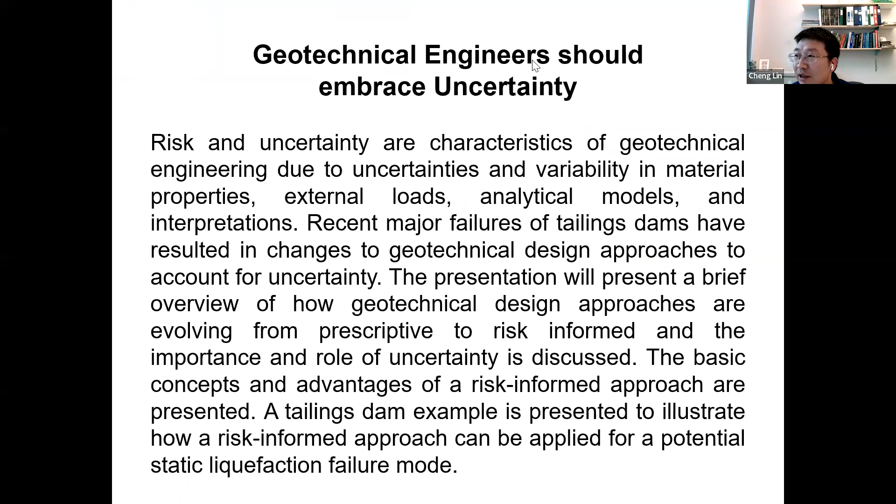Well, thank you for that kind introduction. It's an honor to be the third lecturer for the Soil Mechanics and Foundation Engineering Division of the Canadian Geotechnical Society. I've been a proud member of the Canadian Geotechnical Society for close to 50 years now, and it really is one of the best geotechnical societies in the world, and I'm certainly very proud and honored to be a member. But I do want to cover quite a bit of ground, so I'll get started quickly here.

So the title of the talk is that geotechnical engineers should embrace and understand uncertainty. Okay, how do I get it to go forward? That's going to be a struggle.

This slide, I took the title from Professor Morgenstern, and for the last couple of years, Professor Morgenstern has been using this term that we're evolving from a period of certainty to uncertainty. He's working on a paper that I think has that title, and I think that really captures the essence of what I'm going to try and talk about.

Risk and uncertainty are characteristics of geotechnical engineering due to uncertainties and variability in the material properties, external loads, analytical models, and interpretations. Design approaches are evolving to account for uncertainty, and that's what I'm going to talk about here - how design approaches are evolving, and then I'll give some examples.

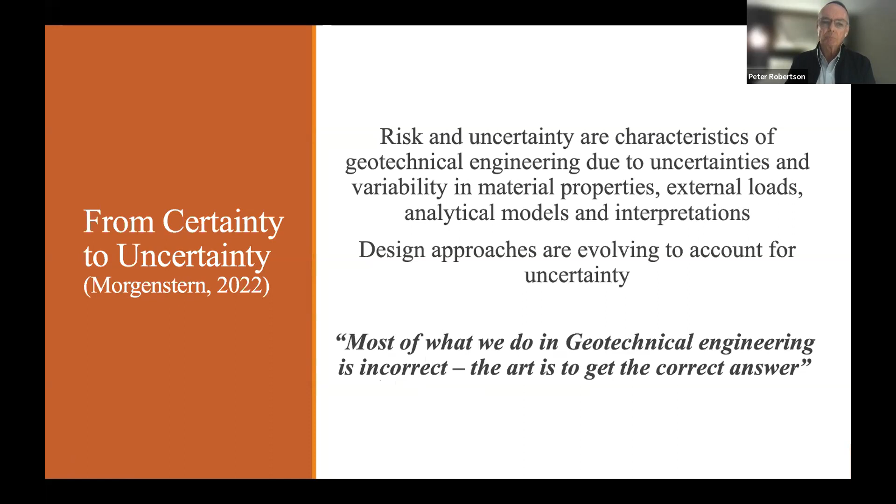If I briefly describe how design approaches have evolved - traditionally they were very prescriptive. In foundation design, that's often working stress design, but prescriptive in the sense of a traditional design approach based on an overall factor of safety. Modern design codes are based on these factors of safety, or for foundation design, partial safety factors such as the load and resistance factor design approach. The problem with this is it can lead to complacency and depends a lot on the competency of the designer. It's also important to note that factor of safety is unreliable if the site has a brittle failure mode.

I'm going to illustrate that in a moment. I've just shown an example at the bottom of a typical prescriptive design approach - this is from the Canadian Dam Association. It sets out different loading conditions and different minimum factors of safety that you're prescribed to meet.

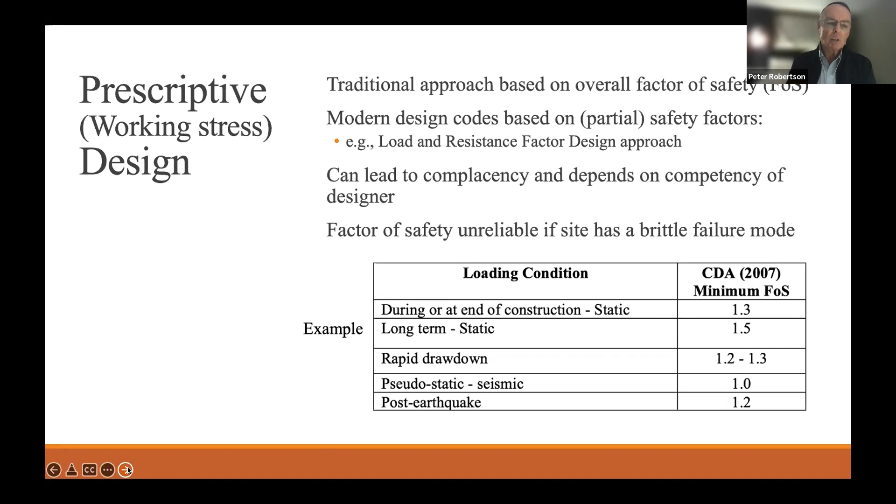But I would like to illustrate a brittle failure mode. I was involved in the investigation of the Feijão tailings dam failure in Brazil, often referred to as the Brumadinho failure because it occurred close to the town of Brumadinho. It was unusual in the sense that, first of all, it was captured on video, and we're going to look at that video in a moment.

It was January 25th, 2019, around midday, a sunny day, partly cloudy. Video cameras had been set up recording the dam, so they captured this high quality video image of the failure.

The things to be observed were that there were no signs of distress on the dam. In fact, people were on the dam at the time, and in the center you may make out a small drill rig that was drilling a hole - it had almost completed its hole down to the foundation. There were other vehicles and other people, some people on the lower portions, and there were also some cows grazing on the grass. So there were no outward signs of distress, and then quite suddenly, this happened.

You'll note that suddenly the crest drops and the toe begins to bulge, and the whole thing begins to collapse and move out extremely rapidly. In a period of about 15 seconds, the dam had completely failed.

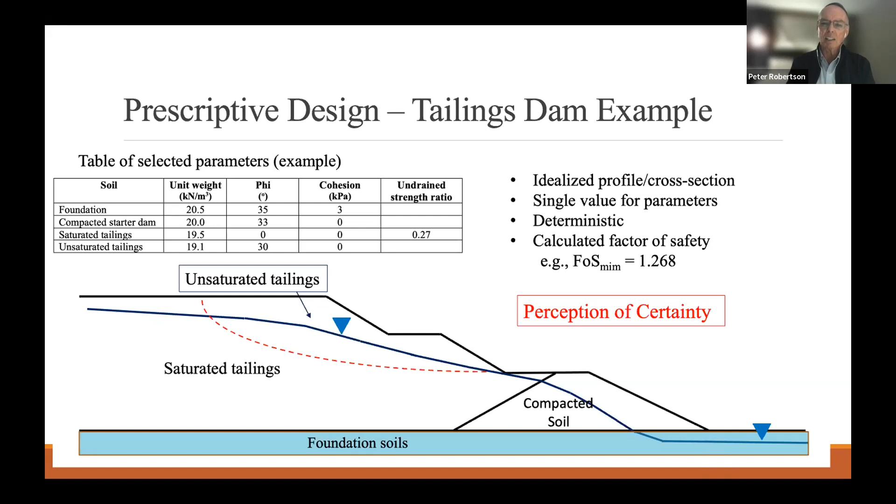I wanted to illustrate that it's usually quoted to 3 decimal places, so 1.268. This clearly gives a perception of certainty - when you do a calculation like this and present a factor of safety like this, it's clearly presenting to the client and all the various stakeholders that will read the report that there's a certain level of certainty here, since you're quoting it to 3 decimal places.

Designs evolved from the initial prescriptive and then moving to more precautionary design. This is the prescriptive combined with the observational method. Any performance that indicates potential failure is identified and it's monitored to determine if mitigation measures are needed. That's the sort of simple concept of the observational method.

So running a prescriptive design and then combining it with the observational method requires some contingency design or action that can be implemented in a timely manner, but it's reactive - based on the observations. It's effective when the variations in performance can be foreseen and remediation measures identified and implemented in advance.

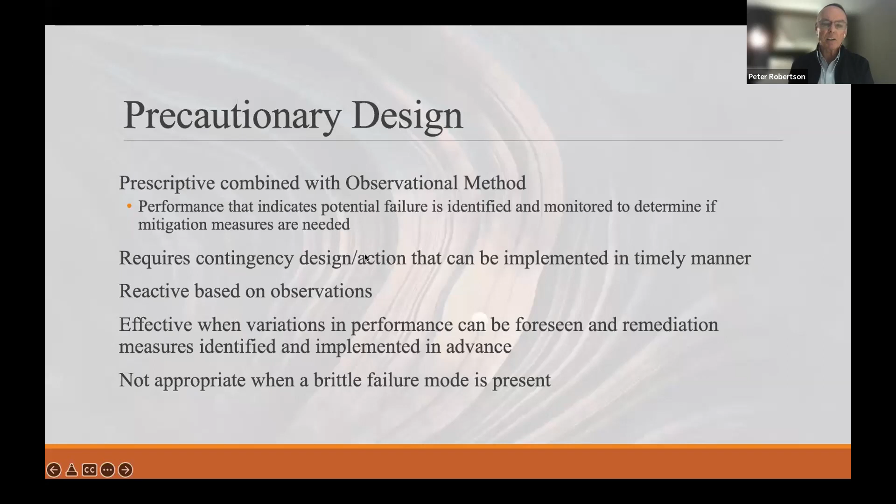It's not appropriate when you have a brittle failure mechanism, such as the Brumadinho video that we saw, because after all, there was very little signs of distress. There was no impending failure mechanism occurring, and so there was no time to respond.

Here's an example - that same sort of example I'm going to use, where you've got this upstream constructed tailings dam, you've got piezometers in the tailings, and in the starter dam, you've got an inclinometer survey, you've got InSAR, and you've got observations of seepage and cracking as a typical example. But it's not appropriate for brittle failure mode because Brumadinho had all of these.

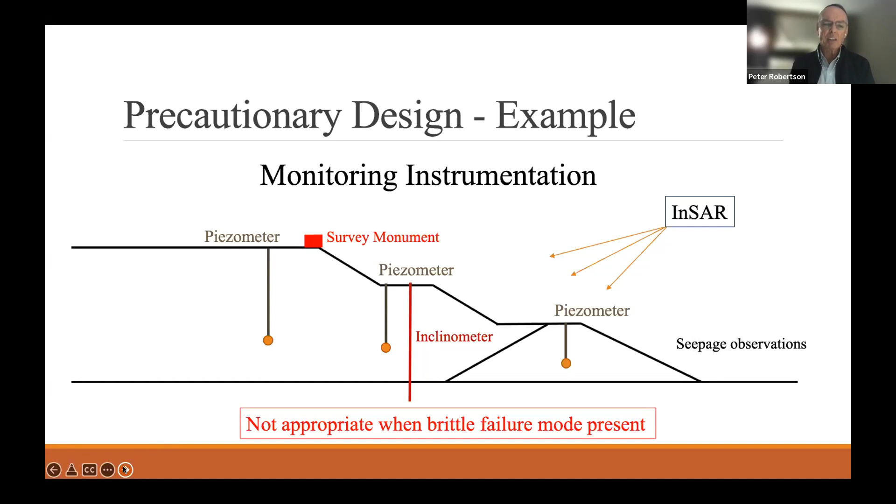They had piezometers, survey, some inclinometers, they were using InSAR, observing seepage, and it was being inspected on a regular basis. But all of that did not help or negate the fact that it did in fact fail quite suddenly.

So that precautionary approach has evolved to a more performance-based design. It's a natural extension of the observational method. It requires detailed modeling to forecast the behavior and verify it with observation and surveillance. It's only possible because of advances in monitoring and analysis.

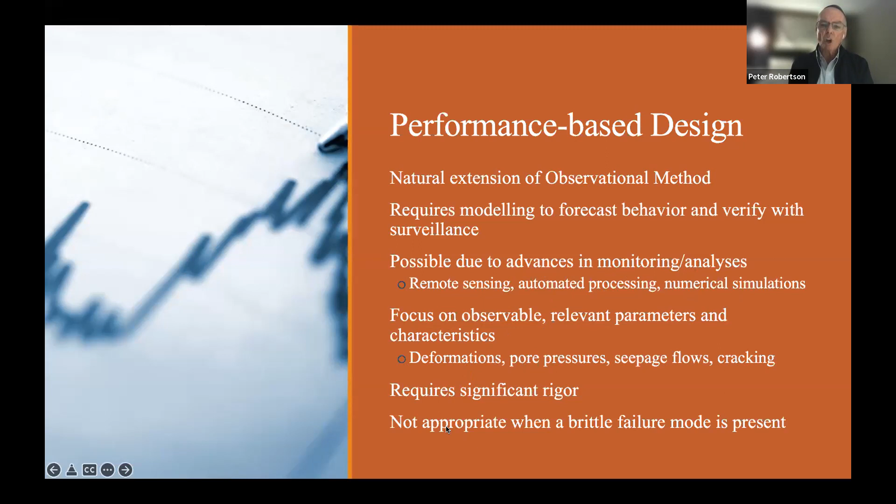So we now have remote sensing, automated processing of the sensing, and complex numerical simulations to predict the behavior. It's focused on observable relevant parameters and characteristics, such as deformations, pore pressures, seepage and cracking, etc. It requires a significant level of rigor, and again, it's not appropriate when you have a brittle failure mechanism.

So its design is particularly in mine tailings, and that's what I'm going to talk to, but I think it will be true for many areas of geotechnical design. It's moving towards a risk-informed design approach.

And in mine tailings, it's driven in part by these recent brittle failures. I showed you Brumadinho, but the failure of the Fundão tailings dam in 2015 was also a brittle failure mechanism. So two big tailings dam failures that were both brittle failure mechanisms really made the industry sit up and rethink how it was doing things, and it's moving towards a risk-informed approach.

So it's based on probability and reliability concepts, and I will briefly review some of those basic concepts. It uses a target annual failure probability or target reliability index to verify margin of safety, and it's informed by appropriate assessments of risk and uncertainty.

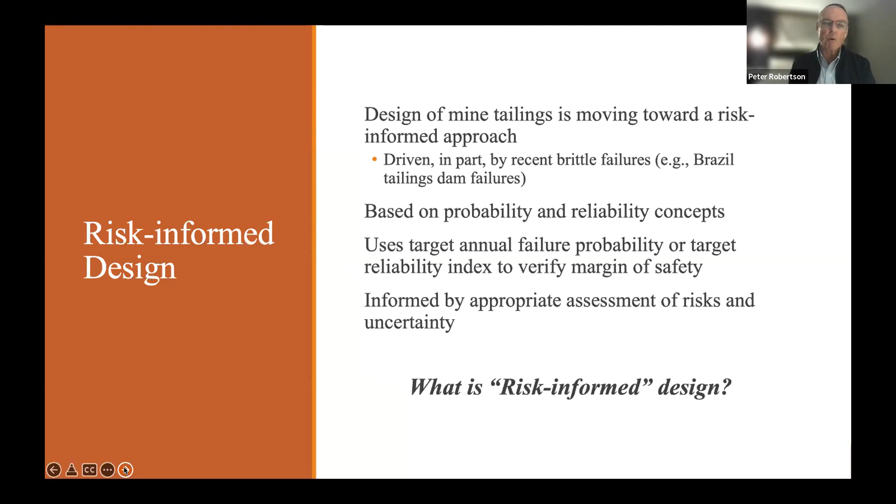So what is risk-informed design? Before we get into that in detail, it's worth covering basic elements of uncertainty and probability. Here I'm going to draw quite heavily from some publications that Suzanne Lacasse has done. She's published quite extensively on probability and risk, and many of those papers are very useful. I've taken an excellent one that she put together in 2019 for the European conference.

This is a frequency plot of, say, undrained shear strength. You see a classic histogram where you've got a mean and a standard deviation of the undrained shear strength, and of course you've got a coefficient of variation, which is that standard deviation divided by the mean. And the uncertainties, or how wide or how large that standard deviation is, are caused by two major things.

One is—I tend not to like these fancy terms—the aleatoric uncertainty, which is due to variability, the natural randomness. Soil, of course, is naturally variable, and so we deal with this natural randomness all the time. We can't reduce it, however we can understand it more by doing more testing to quantify that natural randomness, that variability.

And then we have epistemic uncertainty, and that's really lack of knowledge, such as measurement uncertainty, as well as model uncertainty. And this can be reduced. If we do better tests, better interpretation, we can reduce this epistemic uncertainty, but there'll always be some level of uncertainty.

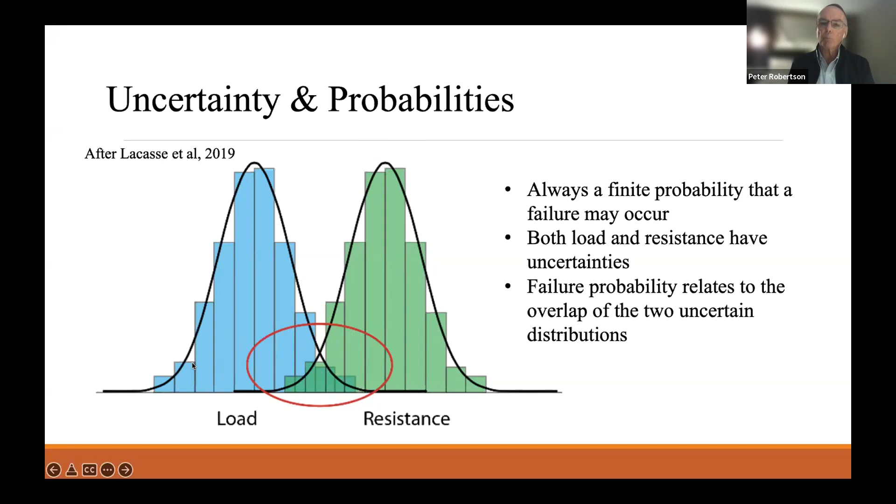If the resistance is smaller than you think and the load is bigger than you think, there is a possibility that failure could occur. And the probability is essentially the area under that curve where the two cross over. So both load and resistance have uncertainty, and failure probabilities relate to the overlap of those two uncertain distributions.

And Suzanne also shows this nice plot. I like this plot because it shows two examples. You have one example where the mean factor of safety is relatively low, it's 1.4, but the level of uncertainty, the standard deviation, is small, so it's got a relatively small uncertainty. This factor of safety has a probability of failure of 1 in 10,000, so it potentially could fail once in 10,000 years. And then you have another one which has much larger uncertainty.

It does have a larger factor of safety, so the mean value gives you a larger factor of safety of 1.8, but the probability of failure is now really just 5 times 10 to the minus 2, or 5 in 100 years, or once in 20 years. So there's a big difference between that high factor of safety, but it actually has a probability of failing once in 20 years, compared to the lower factor of safety that has a probability of failing once in 10,000 years.

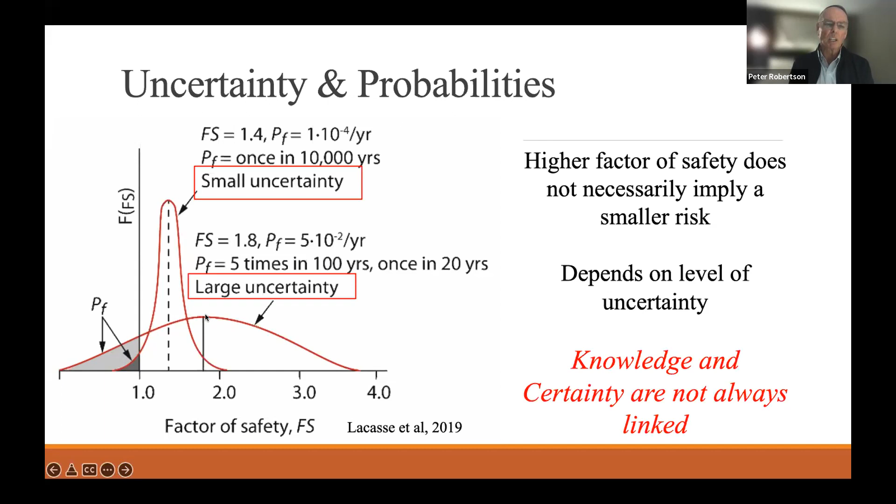So high factor of safety does not necessarily imply smaller risk, and it depends on the level of uncertainty. In other words, the knowledge that you have about the problem is not necessarily linked to the level of uncertainty. You may know a lot about that case that has a factor of safety of 1.8, but the various uncertainties, whether aleatoric or epistemic, result in a large level of uncertainty, and so a higher probability.

Now, Silva and his colleagues in 2008 tried to look at historical cases, and they combined historical and subjective probabilities for engineering practice. They came up with this attractive diagram that looks at annual probability of failure as a function of factor of safety.

And they defined 4 categories, basically from best practice down to poor practice. They talked about best practice as designed, built, and operated to a state of practice, all the way down to the poor one, which is little or no engineering. You can see the examples they used to classify that.

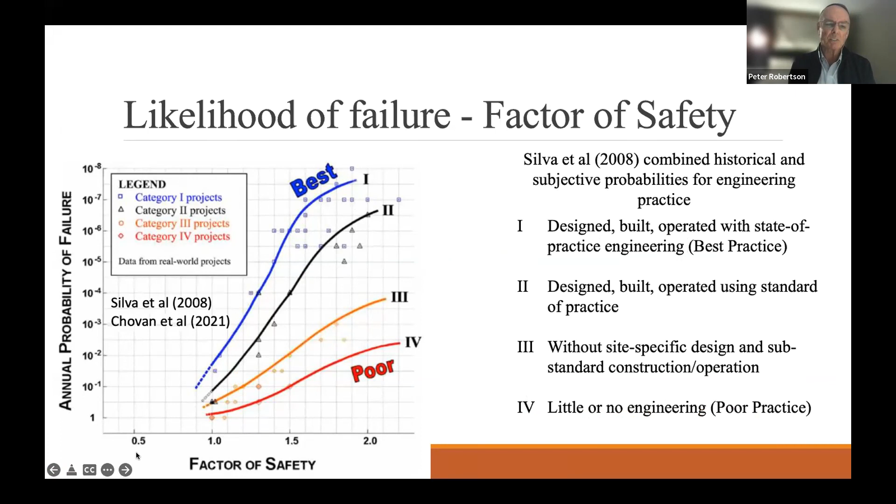But because knowledge and uncertainty are not linked, it might be better to think of this in terms of best practice being when you have low uncertainty, and poor practice being where you have high uncertainty. And that's not linked to knowledge.

So you could well have a condition where you have very good knowledge with little uncertainty, and that would be the upper one. But you could have relatively good knowledge, but with large uncertainty - so 3. So 1, 2, and 3 all could have relatively good knowledge; it's just that they have large levels of uncertainty.

And again, not always applicable to brittle failures. Here, what I've done is - El-Ramly did his PhD at the University of Alberta under Professor Morgenstern, and he looked at 10 case histories. He used limit equilibrium and probability analysis to determine the probability of failure for these 10 case histories.

So he was able to plot these on here, and I've added them here - he didn't actually add them to this plot, I've added it to the plot. It shows that his case histories do fit the general trends of this plot, but only when you think of it in terms of uncertainty.

So some of these cases, best practices were being done, and a lot was known about the site, but they basically acknowledged that, particularly in examples dealing with undrained shear strength. Whenever they were dealing with undrained shear strength of a fine-grained soil, there's large uncertainty of exactly what the value of undrained shear strength is. Even though you did a lot of field work, CPTs, took samples, a lot of lab testing, there's still a high level of uncertainty. So knowledge and uncertainty are not necessarily linked.

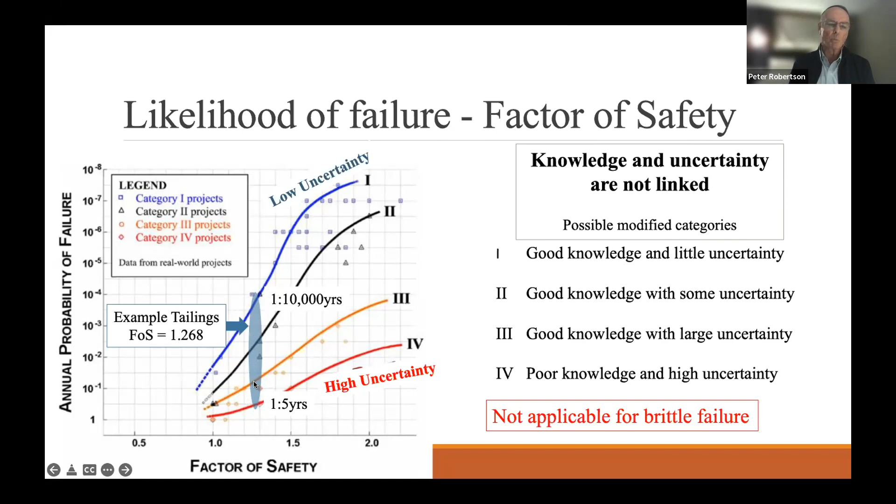And in fact, if we go back to that example I showed that had a factor of safety of roughly 1.3, you can see that if there's high uncertainty in the peak undrained strength, it could be a risk of 1 in 5 years, one failure in 5 years. Or if there was a very low uncertainty, it could be as low as 1 in 10,000 years. But because it's peak undrained strength, we generally move towards higher levels of uncertainty, and so you fit down into these higher annual probabilities of around 10 to the minus 1. That was using peak undrained strength.

So when we talk about risk, what does risk mean? Risk is really this combination of likelihood of failure and the resulting consequences - it's the product of those two. So it combines the probability and the severity.

And in simple terms, it addresses 3 questions. First of all, what can happen? What can go wrong? How likely is it that it could happen? And then if it does happen, what are the consequences that could occur? So risk is higher when the likelihood and consequences of failure are higher, and risk is lower when the likelihood and consequences are lower. It's the combination of the two.

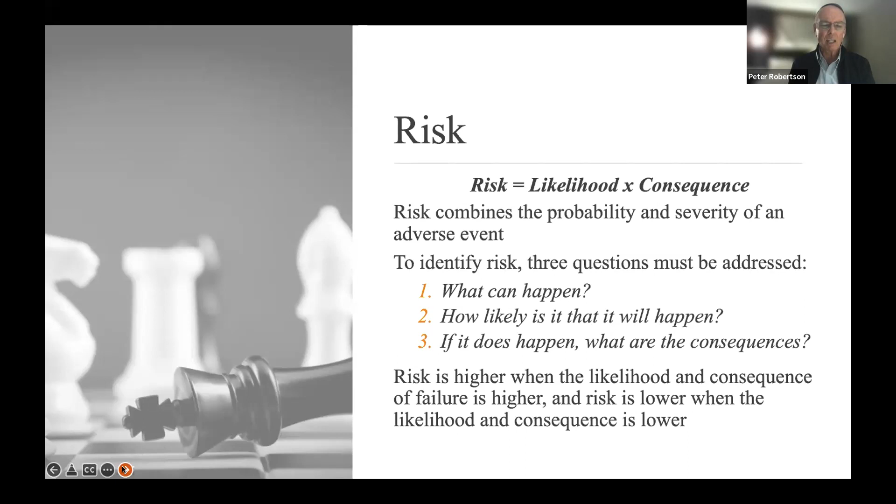You'll see later that in many cases, it's driven more by consequence than by likelihood. Now, when we look at deterministic analysis, which is common in a lot of geotechnical engineering, that prescriptive approach we showed was purely deterministic. It's suitable when there's little uncertainty in failure modes, parameters, or forces. No randomness is involved in estimating the future states.

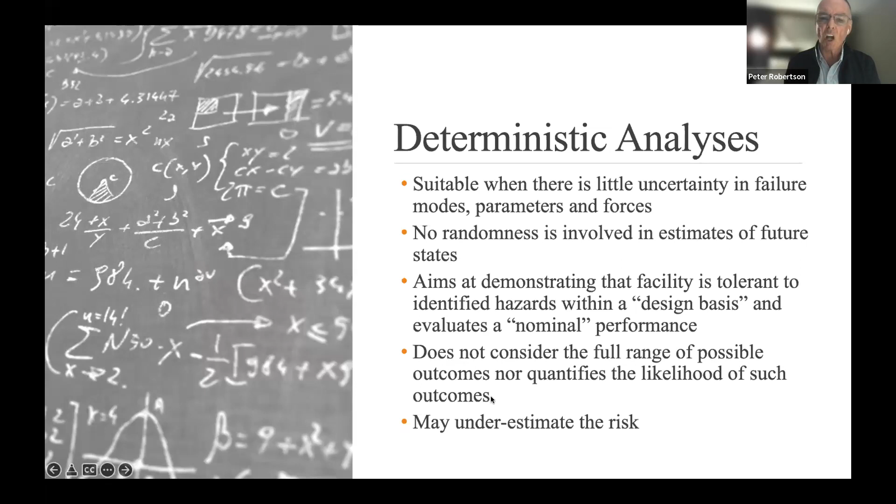It aims at demonstrating that the facility is tolerant to identified hazards within a design basis, and it evaluates some nominal performance. It does not consider the full range of possible outcomes, nor quantifies the likelihood of such outcomes. And of course, it may underestimate the risk.

So we've got probabilistic analysis, and they're obviously more suitable for when you have uncertainties that govern the design. And really that applies to a lot of geotechnical problems. We deal in a lot of uncertainty. And so in many respects, geotechnical engineering is moving towards a more probabilistic type approach and moving away from deterministic.

It attempts to include all possible scenarios, their likelihood and impact. It's comparable to a series of sensitivity analyses. I quite often recommend that people at a minimum do a series of sensitivity analyses, and it's relatively easy to do a relatively large number of them. That doesn't actually quantify the risk and uncertainties, but at least it begins to bracket the likely outcomes.

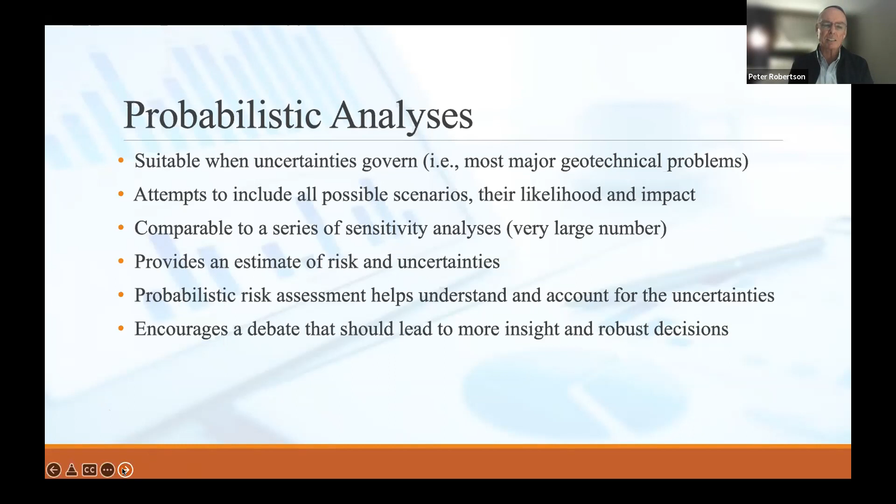If you do a probabilistic analysis, it provides an estimate of risk and uncertainty, and probabilistic risk assessment helps understand and account for uncertainties. More importantly, it encourages a debate that should lead to more insight and robust decisions. So the process of a risk assessment using probabilistic analysis at least gives you insight.

In the tailings world, the ICMM produced this tailings management good practice guide, and they talk about a risk-informed design made up of these components: risk assessment, which is first risk identification, followed by risk analysis and risk evaluation, then moving on to risk management, then communication of risk, and then surveillance and review, and based on that surveillance and review and performance, you update the risk assessment.

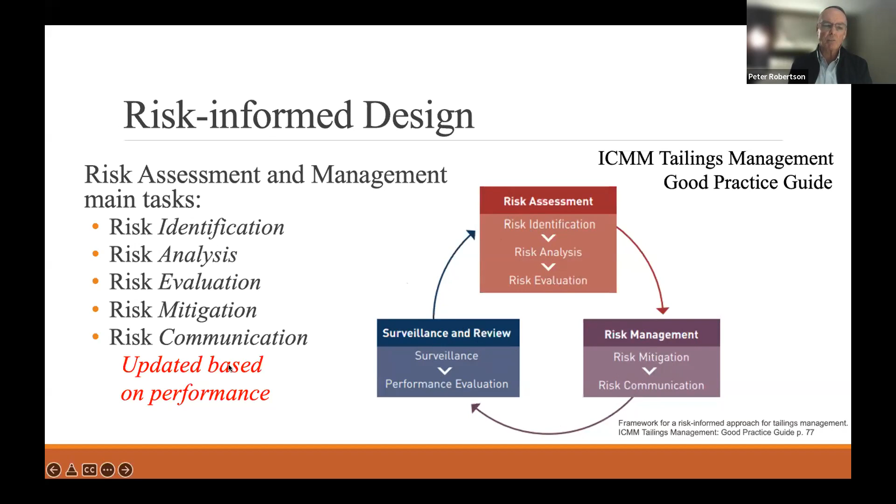So it's a circular process. It doesn't mean you stop doing surveillance and monitoring. That continues to be an important part, but it's part of this cycle of the risk-informed design. I've taken these slides from the International Council on Mining and Metals, since they're quite nice.

So under risk identification, the first step is to identify site-specific potential failure modes. You look at natural hazards, such as earthquakes, extreme weather events, possible landslides, etc. Any hazard that could impact the site.

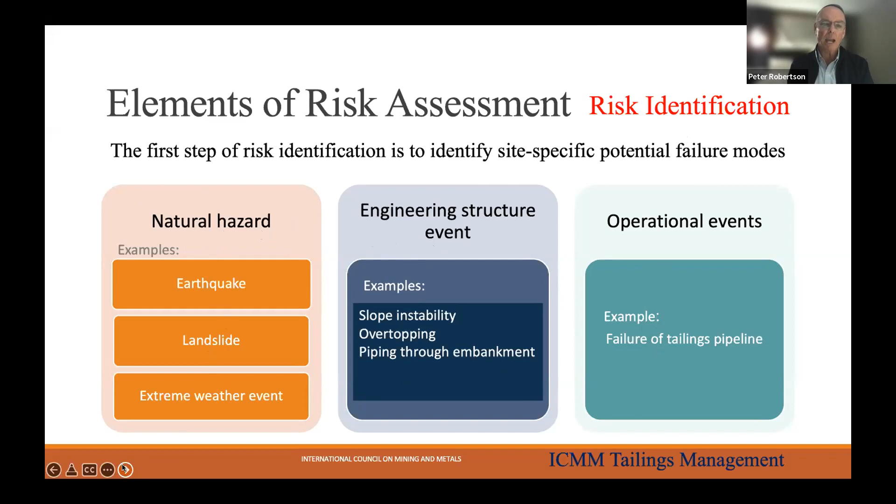You look at how that would impact the structure, such as slope instability, overtopping, internal erosion or piping through the embankment. And then you also look at operational events, for example, failure of a tailings pipeline. So you look at all of these risks that could impact the structure, and then you identify potential failure modes.

So you run a potential failure modes analysis, and here the goal is to try and identify credible and non-credible failure mechanisms. If they're non-credible, you rule them out. If they're credible, you bring them forward to estimate the likelihood and the resulting consequences.

So the risk analysis has three broad approaches. One is a purely qualitative approach - it's subjective estimates through consensus of experts. Then there's a semi-quantitative method, which involves calculations as well as consensus of experts. And there are various ways to do that.

The one I've shown here is an event tree, illustrating again from one of Suzanne's papers. It's a very nice summary of an event tree where you look at some triggering mechanism, whether or not it's strong, intermediate, or weak. You look at the geotechnical conditions, whether or not it could lead to failure, and then eventually what the consequence could be and what the ultimate likelihood or probability of that sequence of events is.

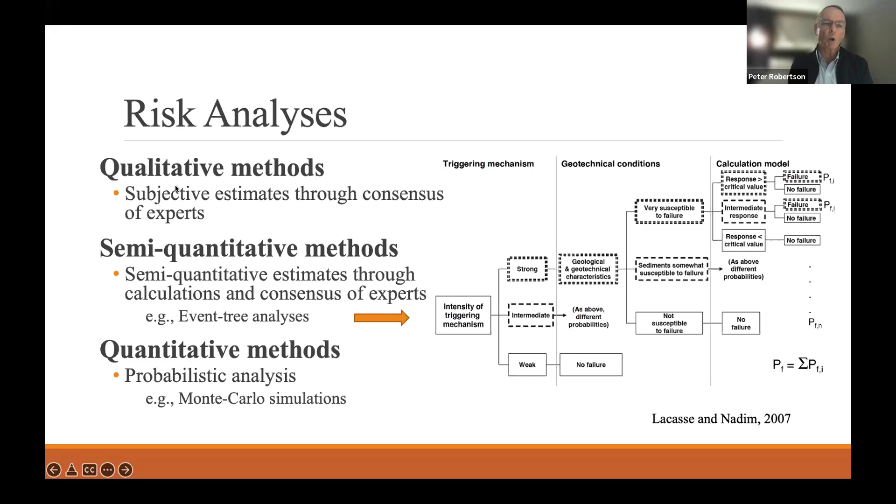And then, of course, you can also do a full quantitative analysis, which involves a full probabilistic analysis, such as Monte Carlo simulations. This is obviously a lot more involved, and not all problems are suitable for a full probabilistic analysis. The trend is to move away from qualitative and more into semi-quantitative and heading towards more quantitative methods.

Now, when it comes to looking at consequence, this is a consequence classification matrix. Hopefully you don't have these things blocking your view that I have for me.

The Global Industry Standard on Tailings Management, GISTM, developed this consequence classification. It's similar to others, but I've chosen this as an example. It has 5 grades from low all the way up to extreme, and it looks at population at risk, potential loss of life, environmental impact, social and cultural factors, and infrastructure.

At the end here, I've added that maybe you could even add another category of reputational damage. Particularly in the mine tailings industry, if you have a significant failure, there's a loss of reputation, and maybe that should be considered too.

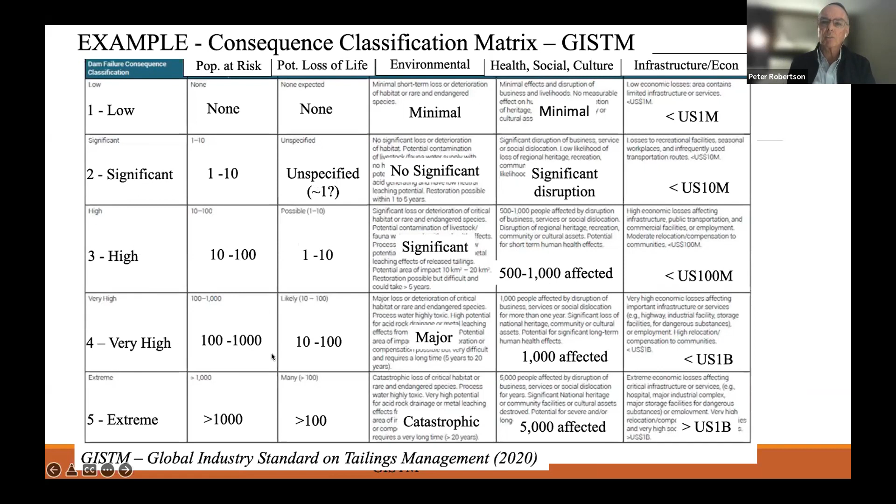If you look at it, anything significant, anything above high, is going to involve a loss of life. High is anywhere between 1 to 10. Significant is unspecified, but one could argue that essentially means one loss of life. It's a bit vague on that, but certainly any classification greater than high is going to involve loss of life, significant environmental damage, and infrastructure costs, etc., less than $100 million.

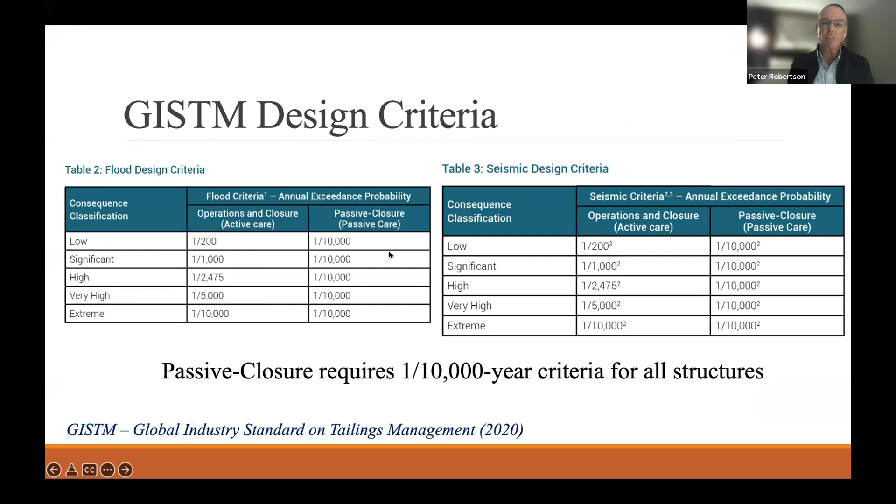GISTM also has design criteria, and it talks about during operation and active care closure, and eventually passive care closure. Depending on the consequence classification depends on the level of design. Here it's for flood, this one is for seismic. But what you notice is that when it comes to closure, it all goes to 1 in 10,000 years.

So it's basically saying that when you're designing something like this, you need to design with closure in mind, because eventually you're going to have to design for 10,000 year events. So possibly you need to keep this in mind even during operations, because eventually you're going to have to go there. It can be more cost effective if you start the process during operation and design.

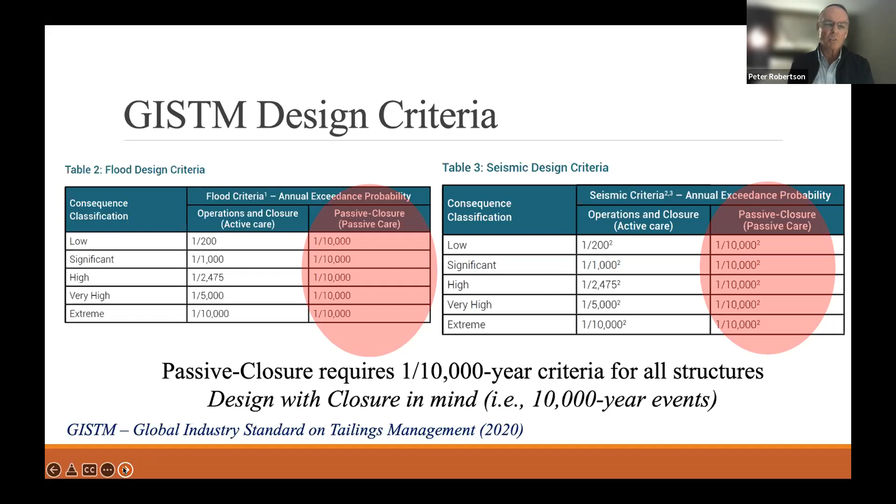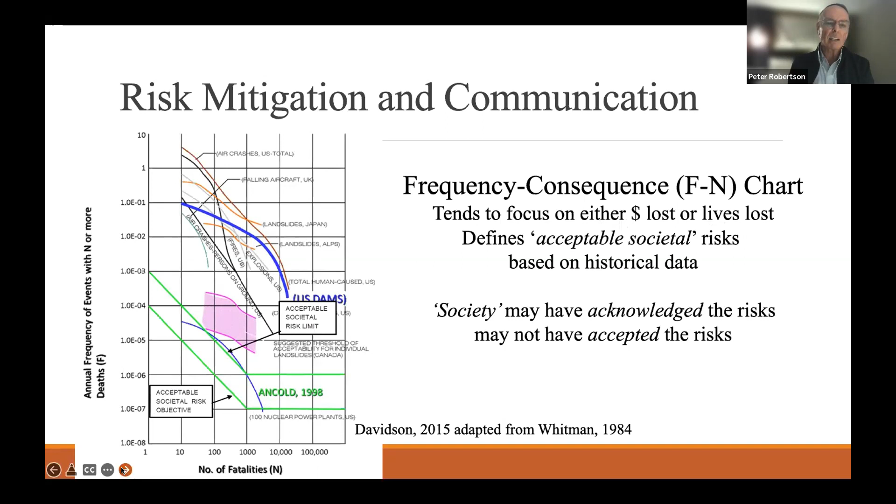Then the US Bureau of Reclamation updated it, and they also defined a region they refer to as the ALARP region, as low as reasonably practicable. You've got probability on the vertical axis here, again number of fatalities, and it has a starting point of 10 to the minus 4.

That originates from, and Suzanne showed it in her 2019 paper, the annual probability of dying, at least based on Statistics Canada, is about 1 in 10 to the minus 4 in the early years of life. I often think that a 1 in 10,000 mortality rate for children is sometimes regarded as the acceptable societal limit. But really, if your child dies, it's unlikely you're going to think that's an acceptable risk, even though statistically it is the average value.

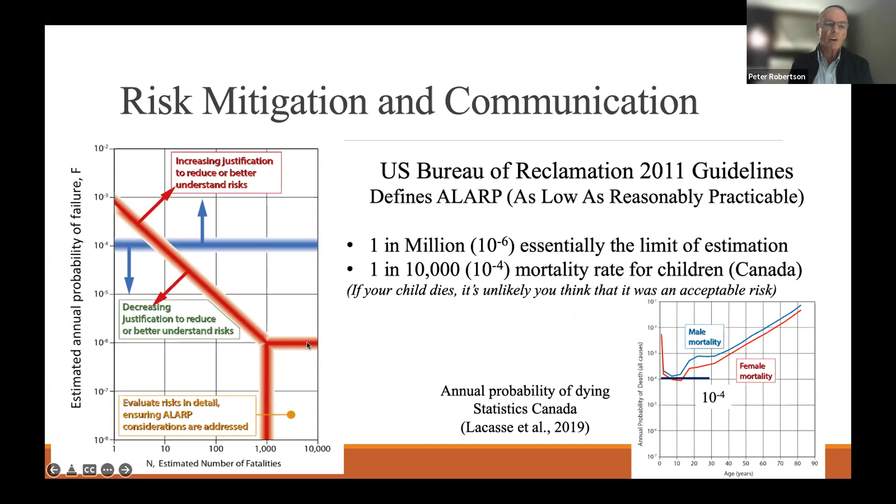It also highlights that a 1 in a million probability is essentially the limit of estimation. It becomes very difficult to estimate anything beyond 1 in a million.

When it comes to communication, this traffic light system has become quite popular. Here it is in terms of a qualitative risk assessment. You've got some hazard category on the left from high down to very low, and then you've got subjective consequence categories from 1 to 5, again 1 being low, 5 being high.

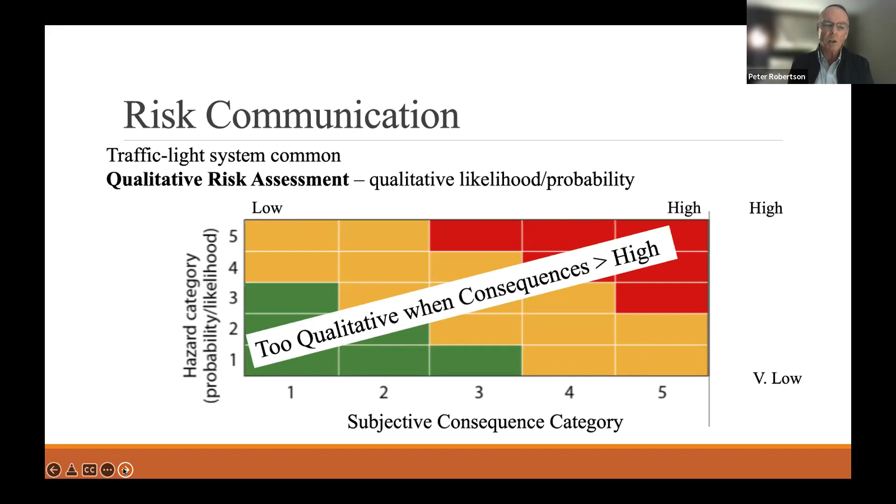The red region is obviously high consequence and high likelihood, and you want to avoid that area, and you'd ideally want to be in this area of low likelihood and low consequence. But it's too qualitative if the consequences are quite high, which, as you saw, as soon as you start talking about loss of life, you're into the high consequence region. So these quantitative risk assessments can have a similar traffic light system, but now you can see actual values.

So instead of subjective categories of probability, you've now got real probabilities from 10 to the minus 1, which is a very high probability, a 1 in 10 chance, all the way down to a 1 in a million chance. You can see the red and green, and you can see I've made the red area larger.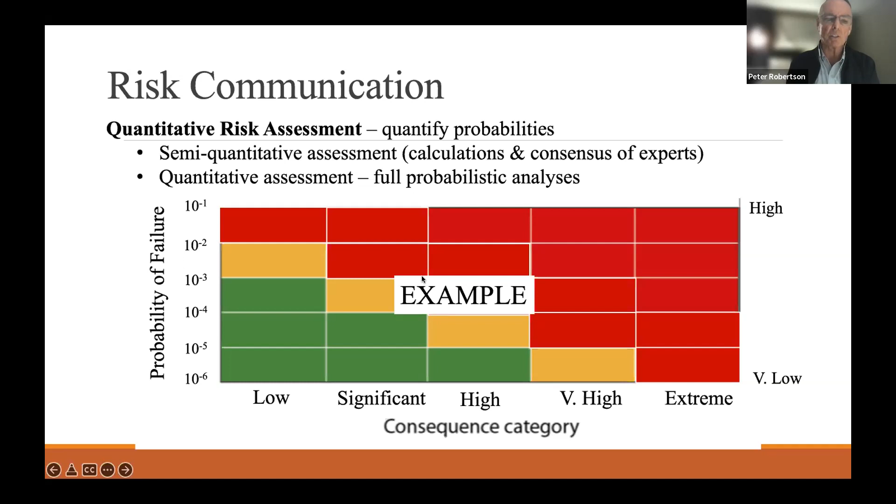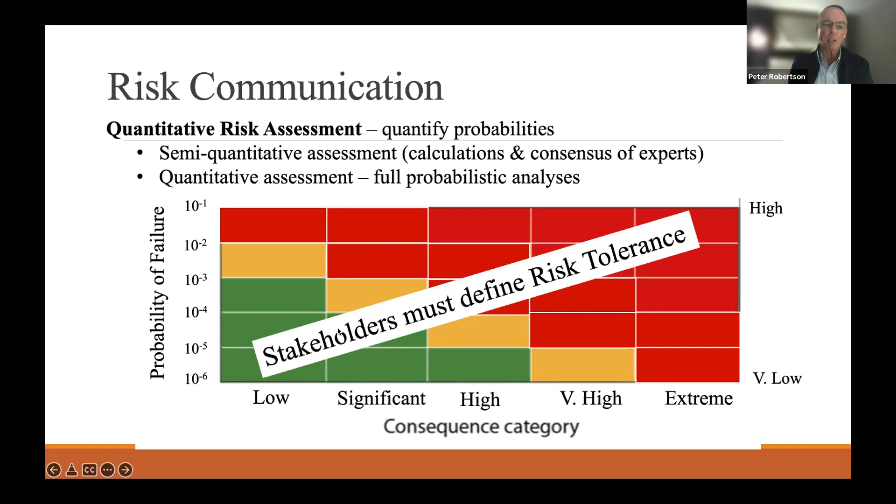Using the GISTM consequence category that says you want to have as large a red area as possible. Stakeholders need to define their risk tolerance - how big should that red area be? Only the stakeholders can really make that call. When it comes to risk tolerance, many mining companies have stated goals of zero harm.

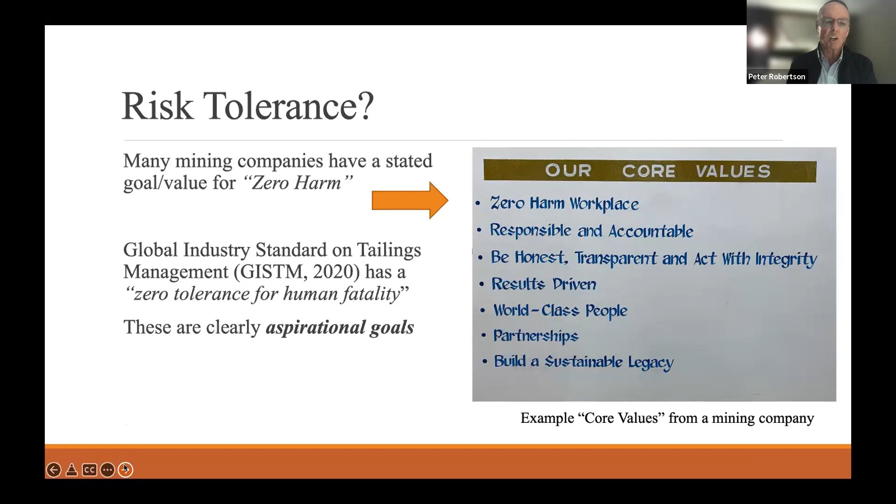This image on the right I actually took at a mine site because it was on the wall, and it was the stated goals, and the number one stated goal was zero harm workplace. This is quite common. The global industry standard on tailings management, GISTM, actually has a zero tolerance for human fatality. It's clear these are aspirational goals, because you can't guarantee there will be absolutely no loss of life, because accidents do occur. So it's clearly an aspirational goal.

But what it says is that owners are increasingly defining this zero tolerance for risk. And when you put that onto this traffic light system, what that essentially says is that nearly everything goes to red other than the low consequence category. Remember, low consequence is no loss of life. Significant could be 1, and high would be between 1 and 10. So a large portion of it starts to go red.

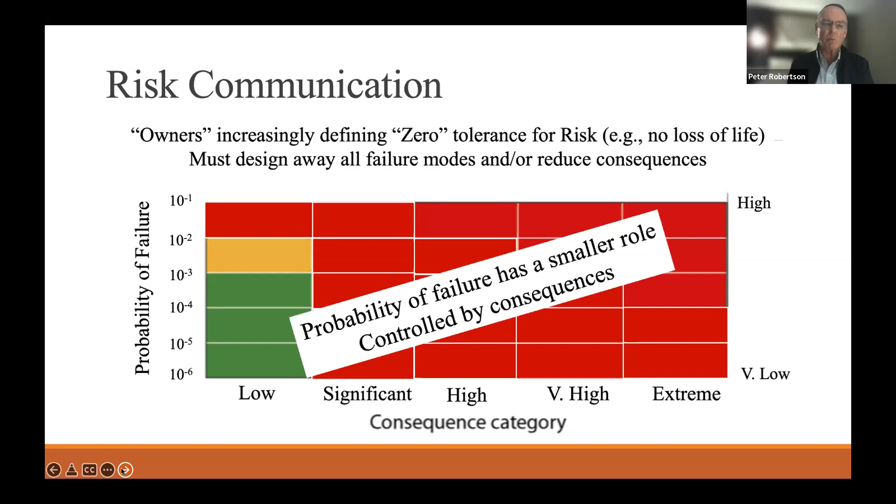And when that happens, it really says the probability of failure has a smaller role, and it's more controlled by the consequences. So basically what it says is you must design away all the failure modes and/or reduce the consequence. You've got to reduce the likelihood of failure down to extremely low values, and it becomes dominated by the consequence of what could go wrong.

Many years ago, when I talked about site investigation, I had said that the complexity of site investigation should be based on the level of risk of a project. If you had low risk projects, you could take a fairly simple approach. When it came to high risk projects, you often do a phased investigation - starting with some simple geophysics and in situ testing, usually followed up by more detailed investigation that could involve additional in situ testing, and usually collecting high quality undisturbed samples and high quality lab testing.

But since it's difficult to get large numbers of high quality samples, and it's costly and time consuming to do a lot of high quality lab testing, often this is in rather limited number. So you often have to then tie it back to the in situ testing, like the CPT, and get a site-specific correlation for this high-risk project.

So for tailing structures, since they're constructed over time, the risk evolves over time. Often when the project starts, the risk is relatively small - the structure could be quite small, it might have a compacted starter dam with very little water behind it, so the consequence of failure is very low. But over time, as the structure grows, the consequences increase, so the risk increases. And so, of course, the level of site investigation should be progressively increased in complexity and sophistication commensurate with the level of risk.

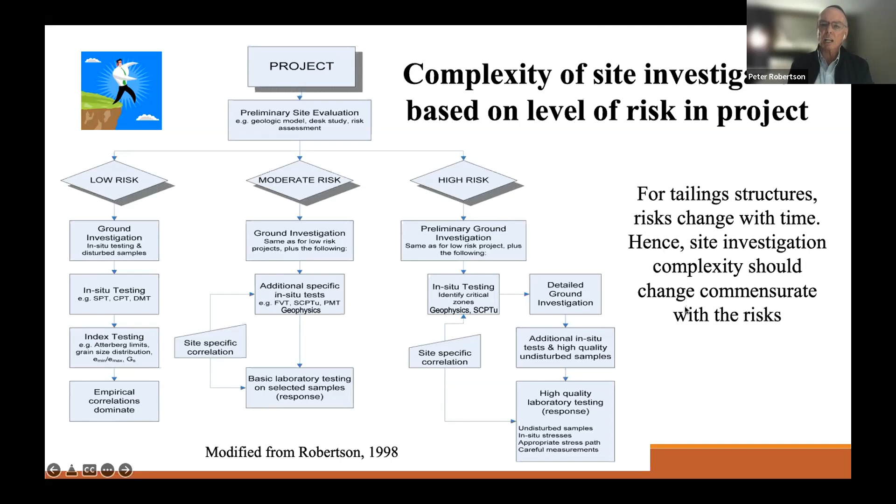So now I want to look at an example. It's a tailings embankment, upstream construction, a ring impoundment, about 4.5 kilometers long. I won't tell you exactly where it is, but I've been involved in several projects with similar geometry, so this is not that unusual.

This one has a consequence classification of very high. It has a starter dam about 15 meters high, compacted residual soils, with foundations of residual soils. It then went to upstream construction in two 9-meter lifts, with a goal of maybe going higher. There was cell raising - a cell construction that would try to deposit coarser, slightly denser sand in the cells, with the looser tailings behind. As I say, 4.5 kilometers long.

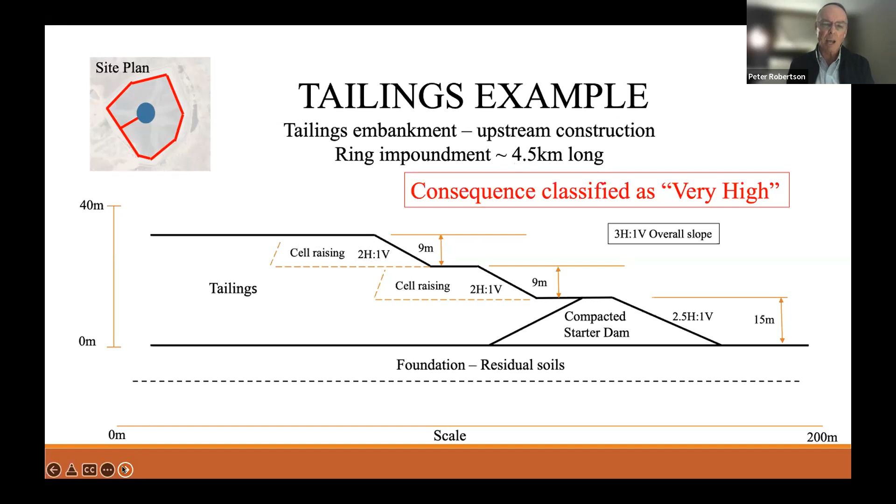I'm just looking at one example of a cross section. So they did CPTs and seismic CPTs.

They did some CPTs near the crest on the tailings, through the cell, and out in the pond, through the first raise, through the starter dam, the compacted starter dam, and also at the toe into the residual soils.

What we see is the tailings are predominantly fine-grained. They've got fine content greater than 50%. The plasticity index is generally less than 7%, and in cases non-plastic. Essentially it's interbedded sands and silts.

If you look closely, you can see the interbedded sands and silts. Each of the spikes up tends to be a sandier layer, and the dips down are the fine-grained silt tailings, and they're generally contractive.

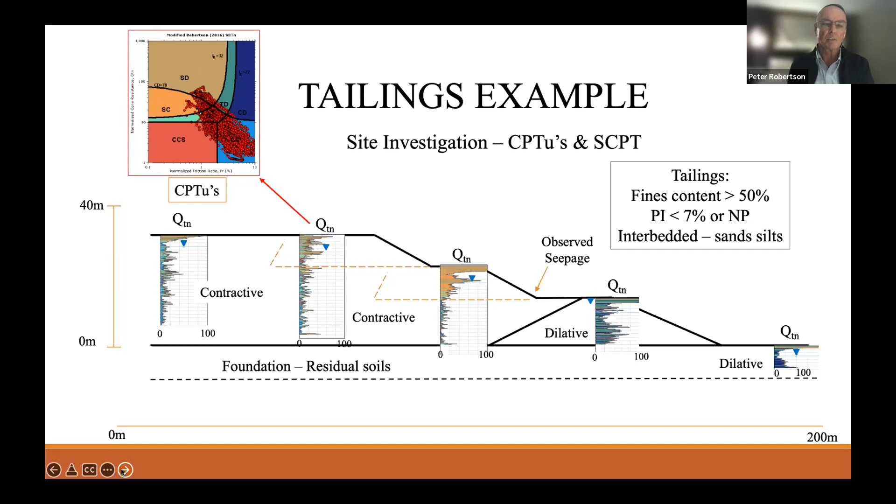The starter dam is dilative and the foundation residual soils are dilative. Here's an example of the soil behavior type chart, showing the contractive-dilative boundary. On this particular CPT, most of it plots in the contractive region. The little bit that's dilative is the upper portions of the cell construction, the sand cell, but most of it is relatively fine-grained silts and clay-like material, all on the contractive side—relatively typical for hydraulically placed tailings.

Looking at the phreatic surface and piezometric surface, there were relatively frequent dissipation tests. Most were relatively rapid, indicating risk of partial drainage in the sandy tailings. The coarser tailings is almost free draining, while the finer silt tailings is undrained. So you get spikes in pore pressure every time it goes through silt tailings—undrained—while the coarser tailings is either partially drained or fully drained.

Frequent dissipation tests show a piezometric profile that's less than hydrostatic. In this case, it's nominally about 70% of hydrostatic, so this arrow is indicating a slightly downward flow.

The excess pore pressures, shown in the piezometric profile in blue, are generally positive due to the contractive nature of the tailings, then negative in the compacted starter dam, and negative in the residual soils.

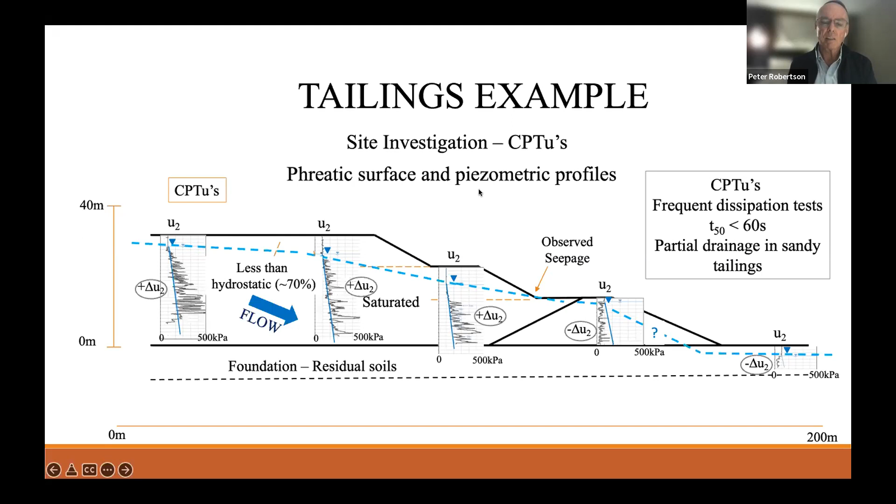So the CPTs and pore pressure are giving quite a bit of information. I mention this because it's common for people to install vibrating wire piezometers. But when you have downward flow, a single piezometer will give you a head of water pressure at that point.

But if you've got downward flow, it's less than hydrostatic. So if you take the head of water measured at that depth from a single piezometer, you can underestimate the real phreatic surface. I'm illustrating it here in orange compared to the real one in blue. So you need at least two piezometers vertically to understand the gradient.

Of course, ideally, if you've done multiple dissipations with a CPT, you already know the gradient. So you can take that gradient and adjust the actual head measured in the piezometer to get the true phreatic surface, or the true surface where saturated tailings exist.

In an extreme case, with very strong downward flow—almost vertical flow straight down—the head measured in a piezometer could be extremely low. You could have what appears to be almost a dry piezometer where the head is essentially zero, and some people would look at that and say the tailings are dry.

But not necessarily, because if you know water is being placed at the top and flowing vertically down, you just have a vertical piezometric surface that's essentially zero. So the tailings could be essentially saturated, but the head at a given depth is close to zero. It can be very misleading looking at single piezometer values when trying to grasp the overall flow mechanism and where the level of saturation is.

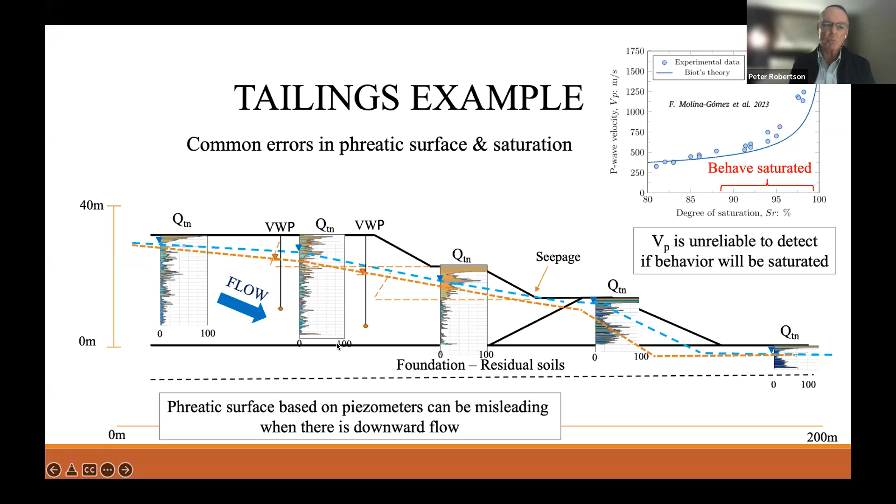That's what the CPT was showing, because when the CPT is pushed in, it compresses the soil ahead of the cone—it could be like 90% saturated, but it pushes it to close to 100% saturated, and you start to measure excess pore pressures quite quickly. So be cautious using P-wave velocity to determine if it's saturated, because it can behave saturated even if it's not 100% saturated, due to these small occluded bubbles.

If you look at the undrained strength, the tailings are essentially normally consolidated. If you joined up all the points of the fine-grained silt tailings, they show it's essentially normally consolidated with a peak undrained strength ratio of normally about 0.22, and it also shows a high sensitivity of 3 to 4. So there's clearly a potential for strength loss in undrained shear—if undrained loading gets triggered, you run the risk of a fairly significant strength loss.

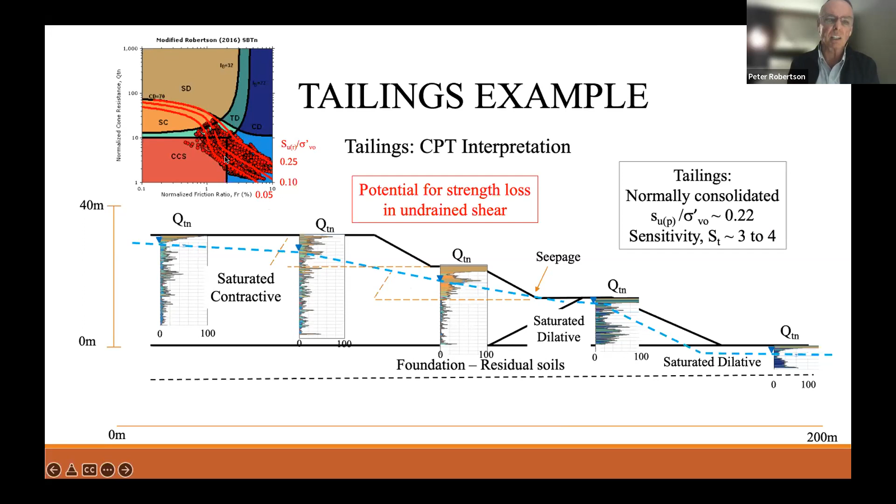That's indicated here—these are the contours of the residual undrained strength ratio. You can see they generally range from 0.05 up to 0.2, varying, but statistically it's below 0.1. In fact, that's illustrated on this next slide: if I take two of the CPTs and run statistics on the residual undrained strength, based on one interpretation method, it shows somewhere between 0.05 and 0.15, with a high level of uncertainty.

What we saw was that potential failure surface we looked at right at the beginning—using a peak undrained strength ratio of 0.27, the factor of safety was about 1.3. Nearly all of the failure surfaces run through saturated tailings, so you could almost do a sensitivity analysis in your head, in the sense that the factor of safety is almost directly proportional to the undrained strength ratio.

In the initial case, with an undrained strength ratio of about 0.27, the factor of safety was 1.3. If I drop that undrained strength ratio from nominally 0.3 down to 0.15, the factor of safety nominally goes from 1.3 down to 0.65, because nearly all of it is through the saturated material. But it's clear that the factor of safety is significantly less than 1 for any one of these ranges of residual undrained strength.

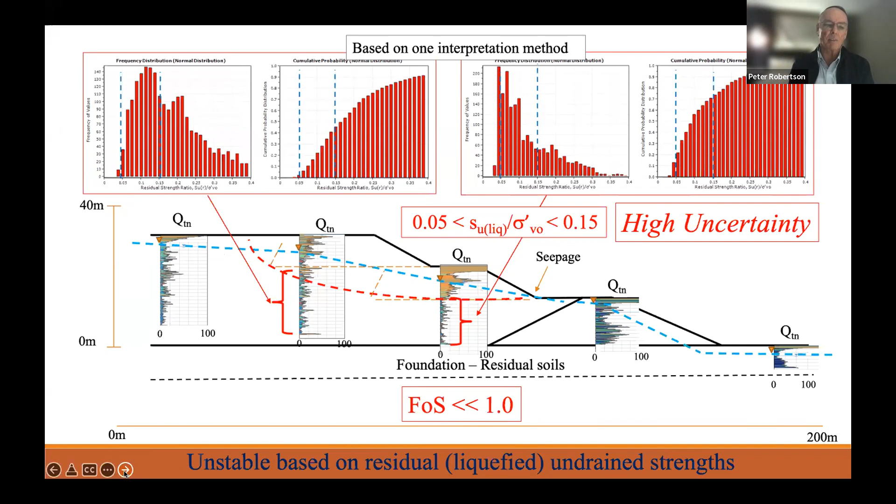And that was just looking at the tailings. If you look at the residual soils in the foundation, these are residual soils, so they're not mechanically over-consolidated—they have a yield stress or an apparent OCR due to the residual bonding. Here I'm showing a number of CPTs done through the foundation, and on the right-hand side is the interpreted yield stress ratio.

You can see it's highly variable, but in this particular case, from roughly 2 meters down to almost 4 meters, the residual soil looks a little bit weaker, and the OCR, or yield stress ratio, is in the order of 5 to 10, with a couple of them around 5. So a yield stress ratio of about 4 to 5 is right on that boundary between contractive and dilative.

Anything less than 5 is going to behave in a more contractive manner. So under its existing stresses, under just 2 meters of overburden pressure, it's lightly over-consolidated and marginally dilative. The CPT indicated that the pore pressures were on the dilative side, and it was interpreted as a dilative material.

Under the weight of the embankment and the tailings, so there's almost 30 odd meters of tailings, that would push this residual soil closer to the normally consolidated region. Portions of the residual soil will in fact be almost normally consolidated under the tailings, and therefore have an undrained strength that's lower than the drained strength. Ideally, you should be putting in an undrained strength, but you can see there's a high level of uncertainty of exactly what strength should be applied under those conditions.

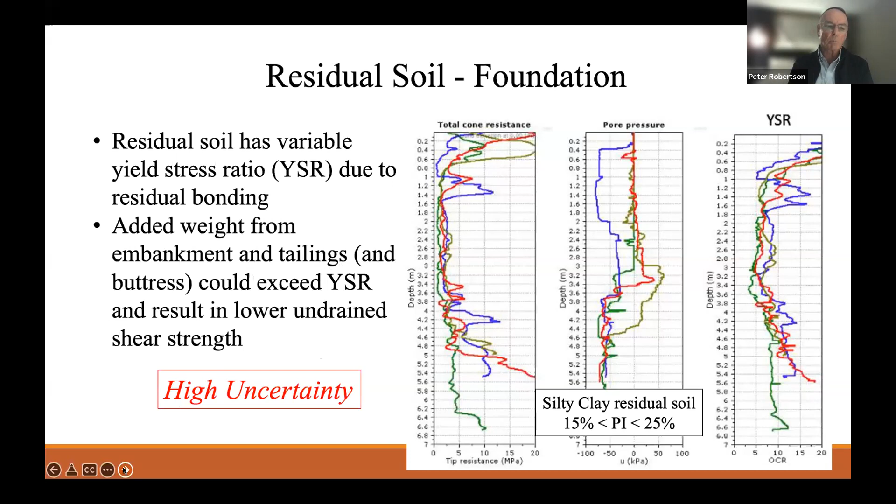So the real issue comes down to, will undrained behavior be triggered? Because we were talking about undrained strengths, and currently the tailings dam is sitting there, behaving in a drained manner. It's behaving perfectly well, no signs of distress, no movements, etc. So everything seems to be behaving well, just like Brumadinho was.

But could some event trigger it to behave in an undrained manner? And if it does, it could then potentially strain soften to these extremely low residual values with very low factors of safety. So when we look at case histories, Brumadinho is an example.

I'm showing two here. The top one is Fundão, where 19 people died, and the failure mechanism was essentially an unknown slimes layer that triggered the undrained response. Below is Feijão, the Brumadinho one, where there was some unknown bonding that potentially played a role in why the material was so brittle, and that resulted in over 250 deaths.

Both of them were very brittle failures, with little or no warning. Observational methods were ineffective. The triggering mechanisms were extremely small and often quite complex, and the consequences were very extreme. There was loss of life involved, significant financial costs in the order of tens of billions of dollars, major environmental damages, as well as criminal charges put against some engineers and executives.

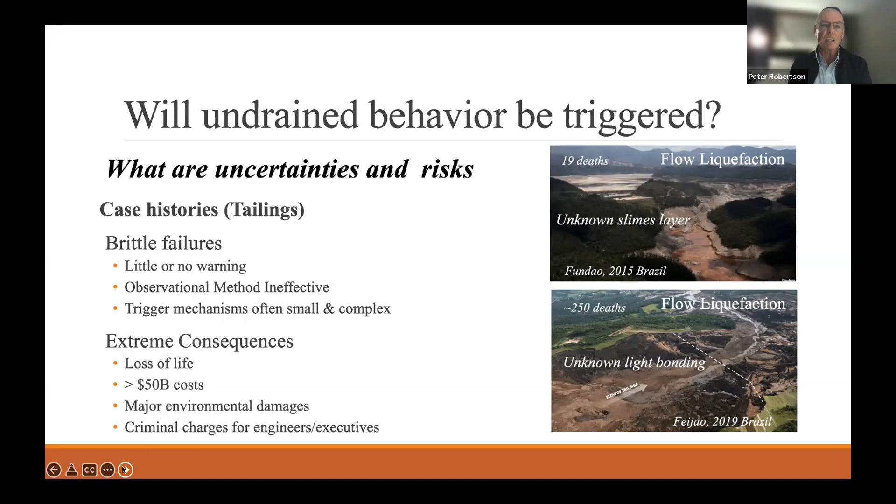If you look at case histories for foundations, and I didn't want to limit it only to tailings, Mount Polley was a foundation failure, an undrained failure through the foundation. It again was a brittle failure with relatively little warning. The observational method wasn't effective, and the consequences were quite extreme: major environmental damages, high litigation costs, and engineers lost their license to practice.

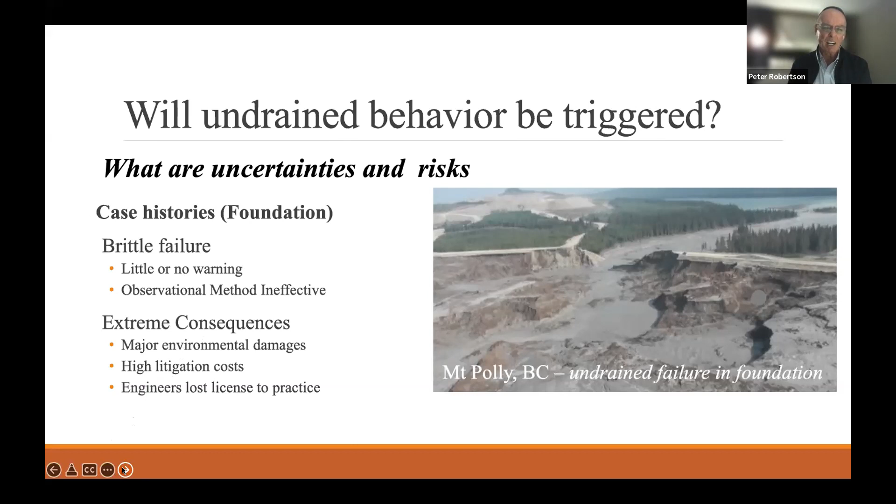That was an undrained failure through the foundation material. Similar to the residual soils, it was an over-consolidated material that, due to the weight of the tailings and embankment, was pushed into its normally consolidated region and was behaving contractively, so the undrained strength was significantly lower than the drained strength, eventually leading to an undrained failure.

So when it comes to analysis, you could run a limit equilibrium analysis, deterministic, but that's unreliable if you're dealing with strain softening behavior. There's uncertainty in terms of how you select the representative parameter. You can see that the peak undrained strength has a large level of uncertainty, as does the residual undrained strength, so they both involve significant uncertainty, and you cannot determine the likelihood - you just calculate a factor of safety.

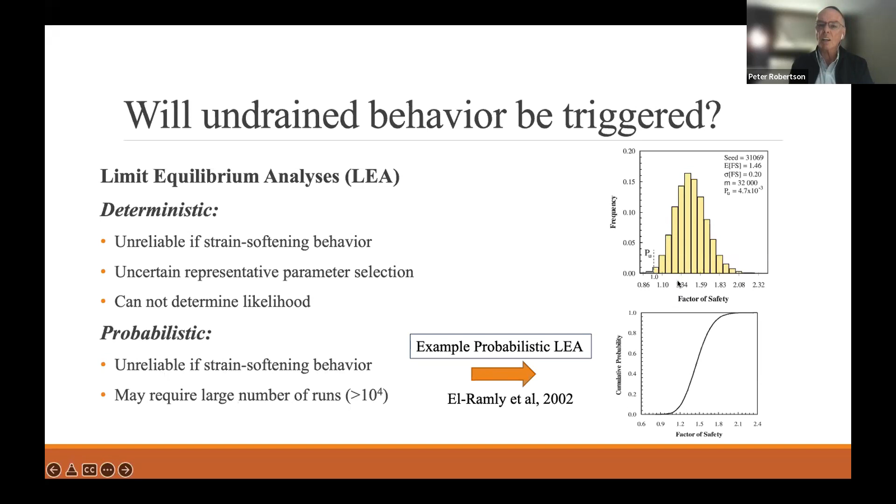You could run a probabilistic analysis using limit equilibrium, like El-Ramly did. It's still unreliable if you're dealing with strain softening behavior, and even if you do it, it could require a significant number of runs, in the order of tens of thousands, to give you an example. Here's an example from El-Ramly's work, looking at factor of safety from limit equilibrium in a probabilistic manner.

You could run advanced deformation analysis, likewise deterministic, but again it requires an appropriate constitutive model, which could be quite difficult if you're dealing with strain softening material. You also have uncertainty about what to select as your representative parameter and its distribution. It can also be very challenging to model all the possible triggers, because these case histories have shown that some triggers are extremely small and complex, so they can be quite difficult to model accurately. And of course, you can't determine the likelihood on a deterministic deformation analysis.

Or you could run a probabilistic analysis, which is what we did for Brumadinho. Of course, we had the advantage of knowing the endpoint - we knew that it failed, so we were calibrating everything to that failure. It was a little bit easier, but even so, we did run a full three-dimensional probabilistic analysis with a variable distribution.

In this case, it's showing state parameter, but the state parameter was linked to the constitutive parameters. And so we were running an advanced deformation analysis in a probabilistic manner.

It can be difficult to determine the representative variability and uncertainty of all the parameters, a challenge to model all the trigger events, and again, may require thousands of runs.

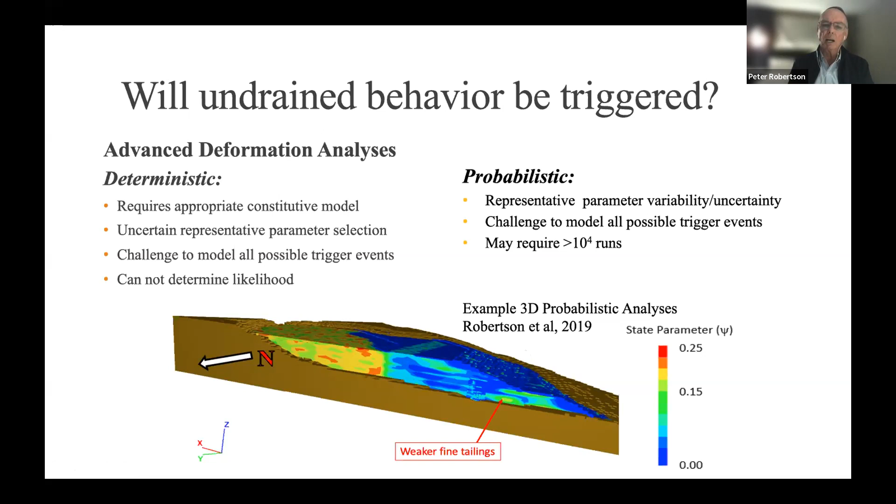peak undrained shear strength. Now, when it comes to this semi-quantitative risk analysis using an event tree, I wanted to talk briefly about that because event tree analysis provides some useful insight.

Here I'm just showing an example. Don't take too much credence on the actual values, they're just examples. So you start with some trigger event that could be, say, an earthquake or a flood.

Here I'm going to show just the earthquake. So you start with like a 10,000 year earthquake, which in this particular case has a PGA of about 0.18 G.

Now, the key when you're dealing with a material that's contractive at large strains and has a potential for significant strength loss if triggered to behave undrained, when it comes to the seismic triggering of that, quite often people run traditional triggering mechanisms, a simplified triggering approach.

Now, the problem with that is the simplified cyclic liquefaction approach was designed for level ground conditions with no static bias. When you're dealing with a slope, such as a tailings dam, you have a significant static bias.

And so if you have a material that is contractive at large strains with a significant static bias, the correction for that static bias is significantly less than 1. So although you might run a simplified triggering mechanism, quite often people seem to forget that they need to add in that K-alpha correction for static bias, which is usually significantly less than 1.

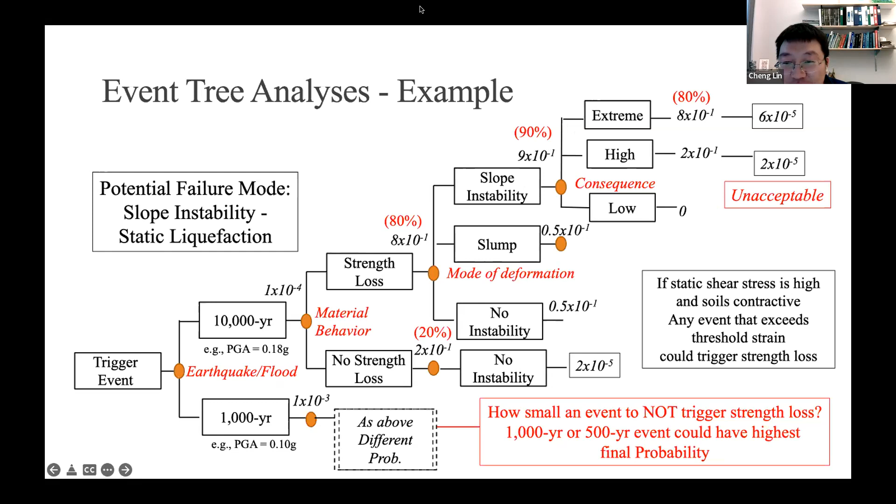Okay, this question was just sent to me, so I don't think Peter you can see it. I'll read it out: in non-tailings application of geotechnical engineering, how can we determine whether or not a brittle failure will occur based on a set of investigation results? Sorry, say it again, I missed the beginning. In non-tailings application of geotechnical engineering, how can we determine whether or not a brittle failure will occur based on the set investigation result?

Well, there's two ways. One is the approximate empirical one: how plastic is the material. We know that low plastic and non-plastic materials tend to be more brittle than highly plastic ones, as I stated earlier. So that's a very simple empirical method, and getting moisture contents and Atterberg limits is a really good starting point. Obviously, when the risk of the project is quite high, ideally you would like to get undisturbed samples and do lab testing.

Now, if you're dealing with silts and sands, getting undisturbed samples can be quite challenging. Critical state soil mechanics concepts then move towards using disturbed samples to determine the critical state line, and then by estimating the state, determine how much strength loss you think is likely, and the lab test would give you some idea of how brittle that material could be.

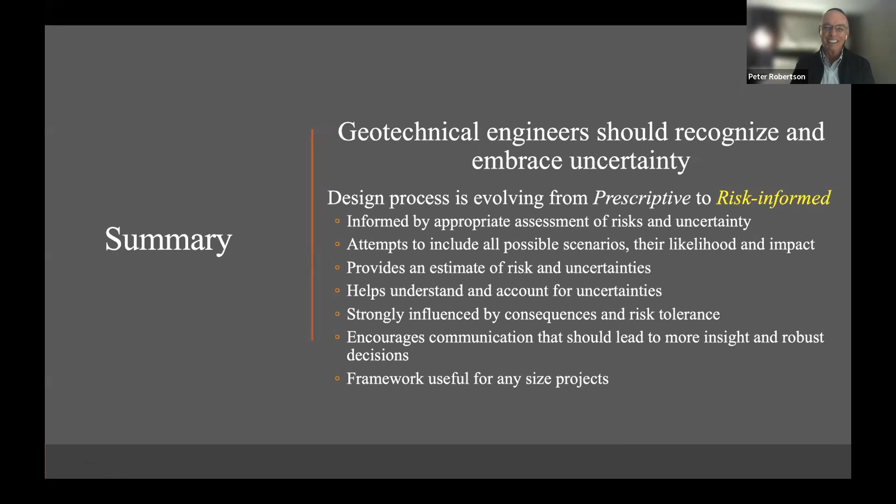Okay, so we're pretty much just right on time now. Maybe one more question. I'm scanning - the good news is most of them saying thanks for a great presentation. I'm not asking a question - those are the ones I like most. Yeah, I think 10 more questions, whatever. So a lot. So, hold on, let me see.

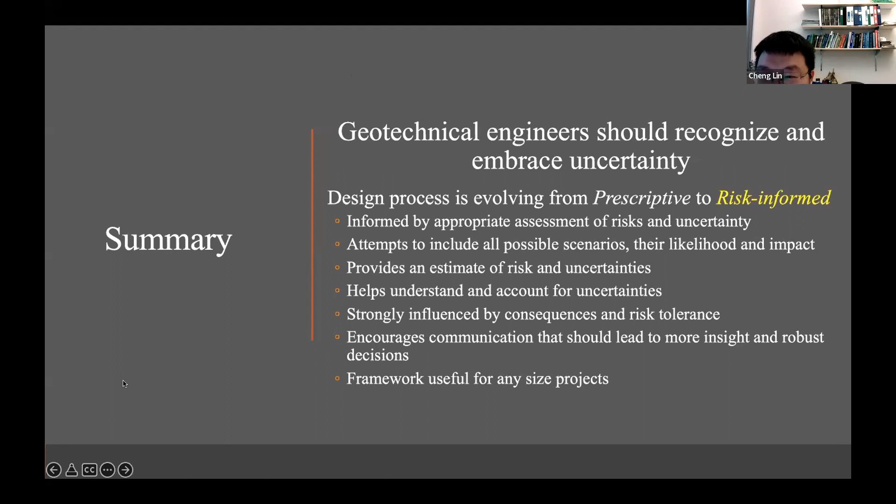Can we develop a simplified thought or approach to be applied in common and probably simple projects? We should always consider risk assessment for any geotechnical case, yet the detail and effort of analysis involved will cause the engineer to shy away from such consideration. What are your thoughts on this? Ooh, that's a complicated question. I apologize, could you say it again? Maybe I should try and find it so I can read it simultaneously. It's the one below, I believe - Robert Egg has given this question: Can you develop a simplified thought or approach to be applied in common and probably simple projects? We should always consider risk assessment for any geotechnical case, yet the detail and effort of analysis involved will cause the engineer to shy away from such consideration. What are your thoughts on this?

Well, if I understand that question correctly, Robert, by showing that event tree, hopefully that's insightful. Quite often on projects I do, in a sense, I mentally do an event tree - I go through the thought process about what events could occur, what the sequence could be, and what the likelihoods of each are. You can almost do it mentally, though it's nice to eventually put it on paper because it's a way of communicating the thought process. But the reason I showed the event tree is it's relatively simple and quite insightful, and it provides a framework to do what we're trying to do. That's why I discussed it as opposed to going into Monte Carlo simulations, etc., all of which are quite elegant and useful, but not always applicable to all problems. Whereas I find that the event tree thinking can be applied to even relatively simple projects.